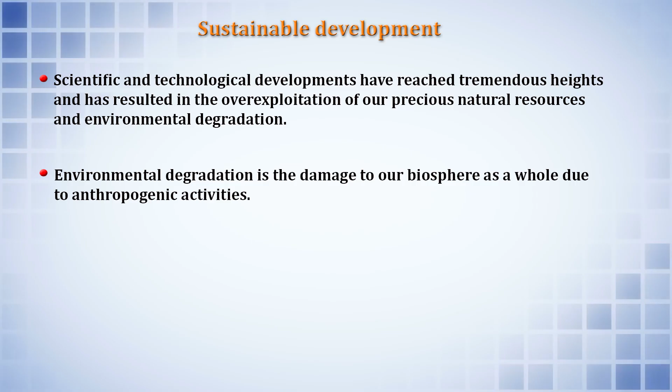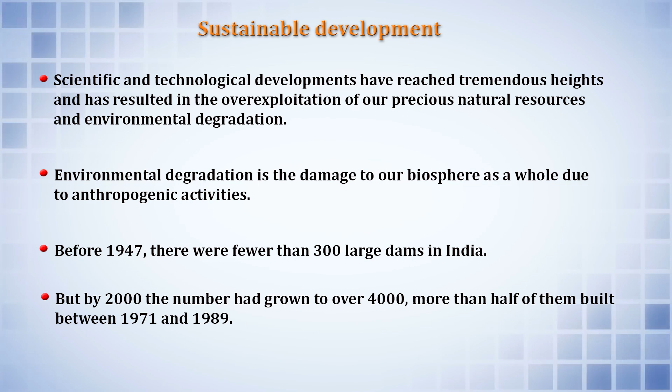Before 1947, there were fewer than 300 large dams in India. But by the year 2000, the number had grown to over 4,000, and more than half were built between 1971 and 1989. So, in dam building, India ranks third in the world after the United States and China. Primarily these dams were built for flood control, water supply, hydroelectric power generation as well as irrigation for the people.

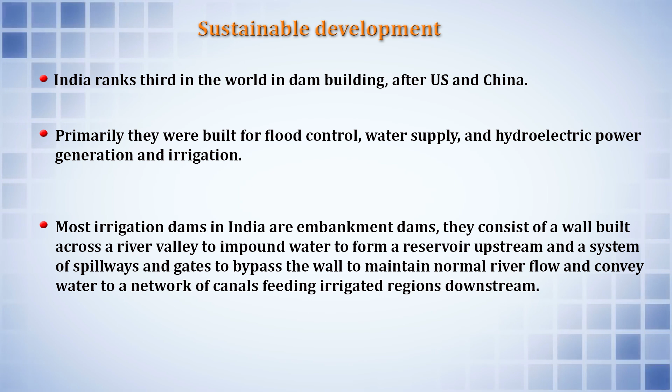Most of the irrigation dams in India are embankment dams, and they consist of a wall built across a river valley to impound water to form a reservoir upstream, and a system of spillways and gates to bypass the wall to maintain a normal river flow and convey water to a network of canals feeding irrigated regions downstream. The upstream areas that feed the dam and those submerged by its reservoir make up the catchment area, and the downstream areas fed by the irrigation canals make up its command area. So, these two are important, the catchment as well as the command area.

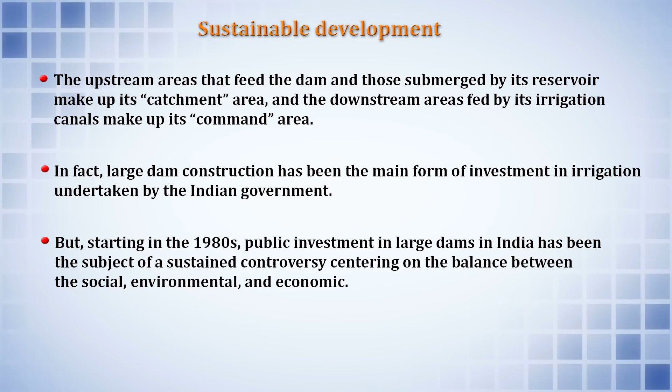In fact, large dam construction has been the main form of investment in irrigation undertaken by the Indian government. But from the 1980s, public investment in large dams in India was a subject of sustained controversy, centered on the balance between social, environmental and economic aspects. The dams have resulted in loss of biodiversity, deforestation and a higher incidence of natural disasters like floods, landslides, seismically induced earthquakes and related socio-economic problems.

Various river valley projects, like the Sardar Sarovar Dam built on the river Narmada, aimed at providing electricity, drinking water and irrigation to the states of Maharashtra, Gujarat and Madhya Pradesh. This project displaced and uprooted more than 1 million tribal people from 570 villages, and that was a real socio-economic problem. That led Ms. Medha Patkar, an environmental activist, to sit on dharnas and strikes and even fast for quite some time to take up this issue. Such is the importance of the socio-economic aspects when dams are built like this.

Hydroelectricity. So, let us come to the topic: electricity that is produced from hydropower. In 2015, hydropower generated almost 16% of the world's total electricity and 70% of all renewable electricity. Hydroelectricity is the electricity made by generators that are pushed by the movement of water.

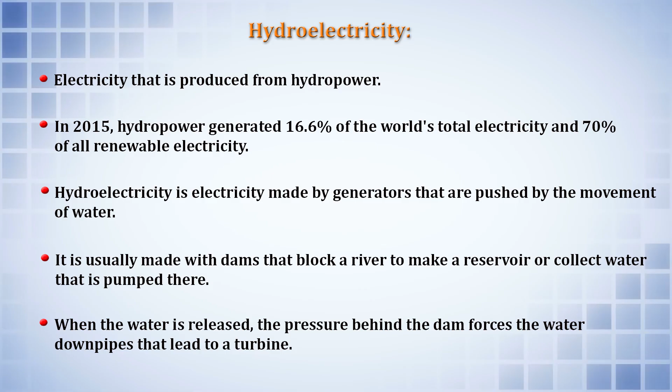So, it is usually made with dams that block a river to make a reservoir or collect water that is pumped there. So, we have already discussed how the dams are constructed and how the hydropower also can be generated. When the water is released, the pressure behind the dam forces the water down pipes that lead to a turbine. In India, for example, we have a large amount of hydroelectricity, and we also have the thermal power plants.

Now, in the hydroelectricity, this is low, and it makes it a very good source of renewable electricity. In many other places nuclear electricity is also used, and the hydro station is good in one fact because it consumes no water, unlike coal or gas plants, and with a dam and a reservoir it is also a flexible source of electricity because the amount produced by the station can be varied up and down rapidly in order to adapt to changing energy demands.

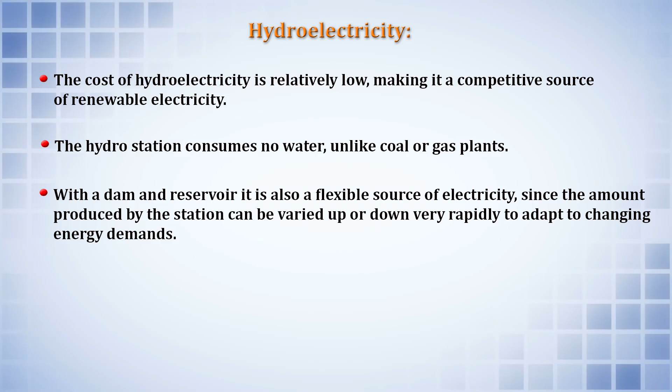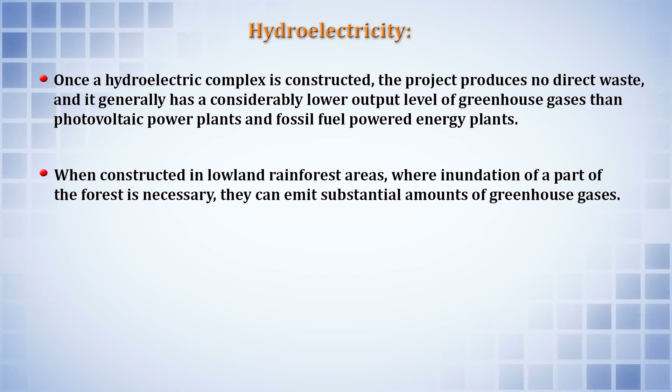Once a hydroelectric complex is constructed, the project will produce no direct waste and it has a considerably lower output level of greenhouse gases than the photovoltaic power plant and the fossil fuel powered energy plants. When these are constructed in lowland rainforest areas, inundation of a part of the forest is necessary, and they can emit substantial amounts of greenhouse gases contributing to climate change.

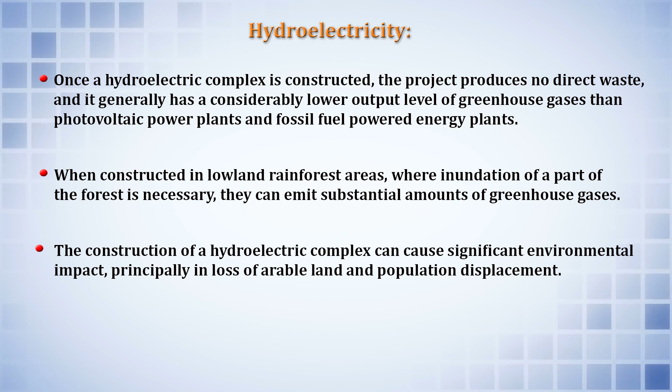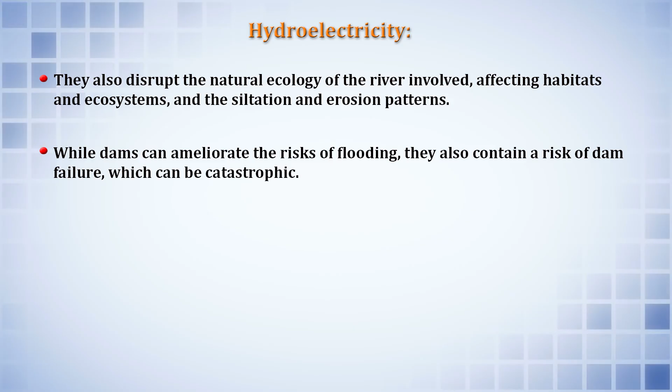So, the construction of these hydroelectric complexes can cause significant environmental impacts, principally the loss of arable land and population displacement. They can disrupt the natural ecology of the river, the habitats and the ecosystem in that area, and they can affect the siltation and also the erosion patterns. Dam constructions, while they can ameliorate the risk of flooding, also contain a risk of dam failure, and that can sometimes prove to be catastrophic.

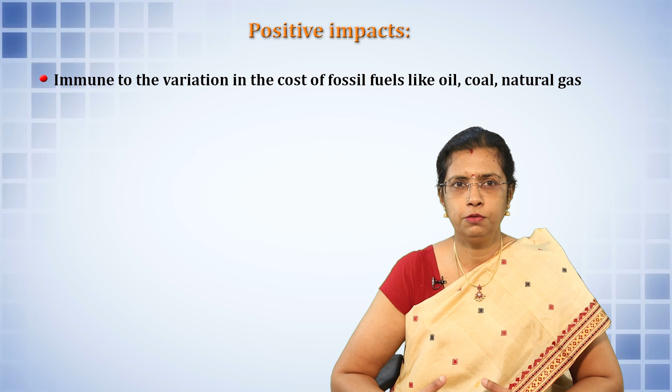So, what are the positive impacts of hydroelectricity? They are immune to the variation in the cost of fossil fuels like oil, coal or natural gas. It is a renewable source of energy. It is a clean source of power, and even in remote areas you can provide electricity. There is improvement in living standards, employment opportunities are given to many, and there is also the creation of a reservoir.

Now, in the EIA studies, basically the background of the project has to be understood. Methodologies have to be described and outlined. Detailed baseline studies have to be conducted. Physiography of the area, hydrometeorology, the soil characteristics, geology of the area, the bedrock characteristics, and the seismicity, whether it is a seismic prone area, also need to be described. The land use and land cover types, floristic and forest types, all this has to be written clearly in the project which is submitted.

Then the faunal elements, aquatic ecology and fisheries, impact assessment and evaluation of the same has to be described. Then whether there can be any impact on the aquatic ecosystem, whether there will be any change in land use and habitat destruction, location of the various structures, species population loss, will that be affected due to these hydroelectric power projects.

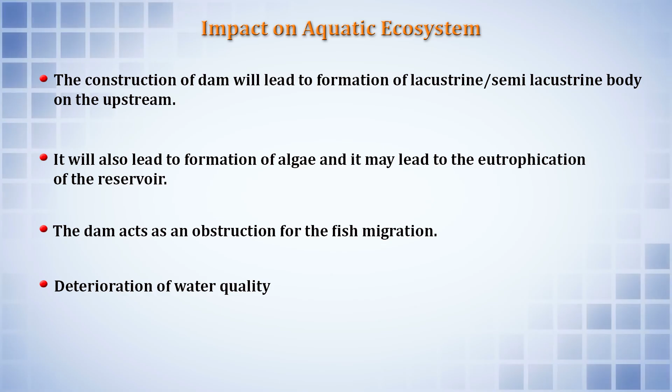Let us now take the impacts on the aquatic ecosystem. The construction of a dam will lead to the formation of a lacustrine or semi-lacustrine body in the upstream areas. It will lead to the formation of algae, and that can lead to eutrophication of the reservoir. Then the dam can act as an obstruction for fish migration. Deterioration of the water quality will proceed. So, those will be some impacts on the aquatic ecosystem.

Then there can be runoff of the loose muck, effluents from the crushers, sewage disposal from the labor colonies, that is, those people who are working in the project will be making some temporary camps and shelters. So, from there also the sewage disposal can come. Then activities such as bathing, cooking and drinking will have a negative impact. In the same way, untreated sewage can also be disposed in the river, and it will lead to an increase in the organic content of that river.

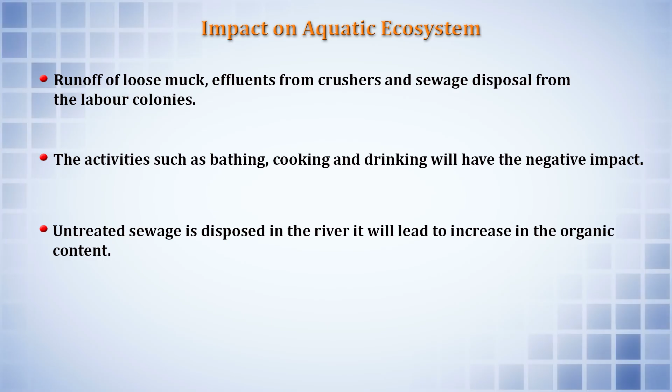In the same way, impact on the air environment. So, the vehicular movement that is needed for the drilling, for the tunneling and for the digging purposes. All these are the infrastructures that come along with the project, and these mechanized machinery will have a lot of movement, and they will also emit a lot of the air pollutants.

Then they use the diesel generators to supply the electricity. There can be emissions of the nitrogen oxides, the sulfur dioxides, production of carbon dioxide and methane due to the decomposition of the organic matter, and also from the primary processes. All this will impact the air quality and the air environment.

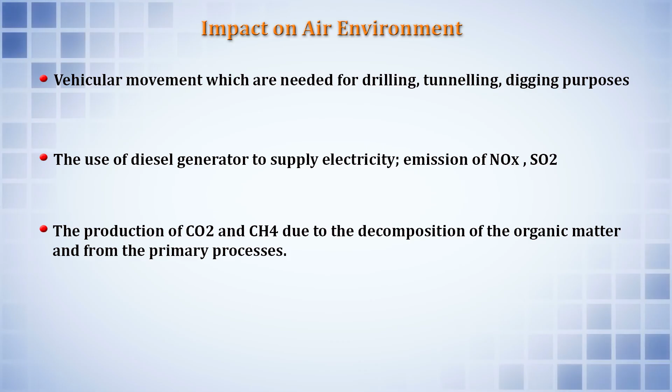Noise pollution. There will be the construction activities. Older people and young people are highly sensitive receivers. When there is blasting, a lot of noise will be generated. So, the noise can actually trigger high blood pressure, and when such high noise levels are coming consistently every day, they can also get affected with cardiovascular diseases, they can have sleep disorders and so on. So, noise pollution is also a very important factor and outcome of the hydropower complex and project activities.

Then whenever any EIA assessment is being done, the tools and techniques that are going to be used also need to be analyzed. So, what are the maps and the overlays that are going to be used, any network diagram to be used, matrices that are going to be used, this needs to be described. Based on the project details and the baseline environmental status, the potential impacts as a result of the construction and operation of the proposed hydroelectric project can be identified.

So, the EIA for quite a few disciplines is subjective in nature and this cannot be quantified, but wherever possible the impacts can also be quantified, and otherwise the qualitative assessment can be undertaken. The anticipated positive as well as negative impacts of the proposed project have been enumerated both during the construction and the operation phases in many of the hydropower projects. So, the construction and operation phase will comprise various activities and each of them will likely have different impacts on the environment. Thus, it is important to understand and analyze each activity and to assess the individual impacts on the environment.

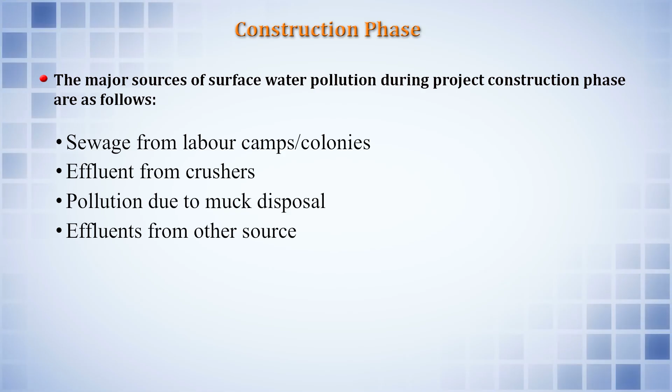Then, if we have to take the water environment, we need to describe the water quality, the sediments presently there and what will be generated as a result of the activity, water resources and the downstream users who are using this resource. Then, in the construction phase, the major sources of water pollution can be the sewage from the labor camp, from the crushers, the pollution due to the muck disposal, and also from other sources.

Operation phase, you can have it from the project colonies, from the reservoir water quality, eutrophication risk, and also the sediments. Air environment: during the construction and operation, generally there will be a lot of air emissions that are coming out, even the particulate matter which can actually obstruct the lungs and the respiratory system.

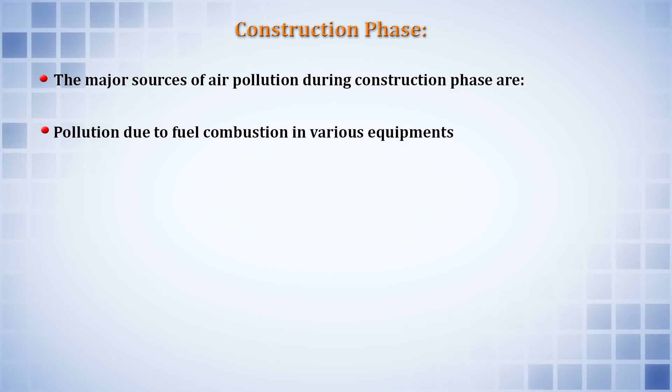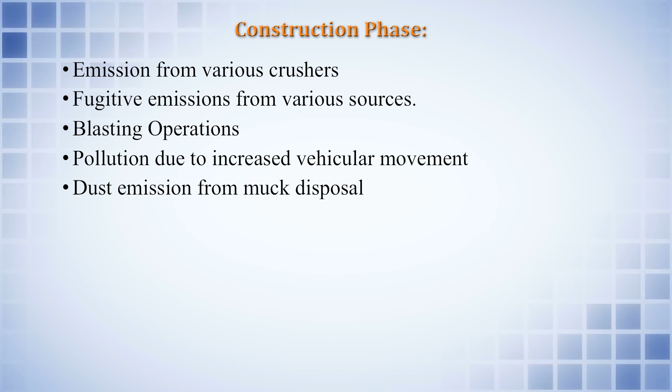In the construction phase, the pollution due to the fuel combustion in the various equipments can also impact the air quality. So, this could be from the crushers, from various sources, blasting operation, pollution due to increased vehicular movement, dust emission from the muck disposal, and then during the operation phase also particulate matter due to vehicular movement and from the muck disposal. All these can be certain places and sources for the emissions.

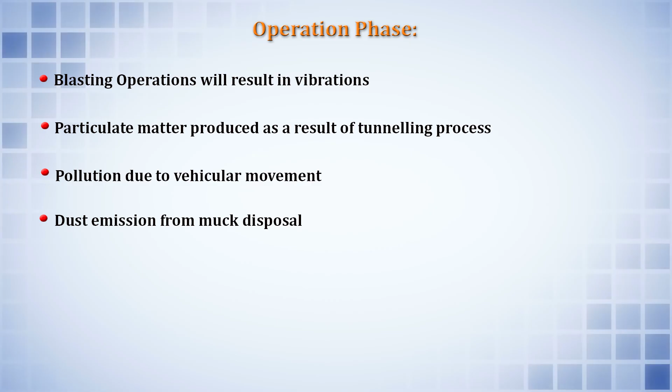Impacts on the noise environment. Here again, during the construction phase, increased noise levels will be expected due to the earth moving machinery, and otherwise due to the quarrying, the blasting, the vehicular movement, that can also have adverse impacts on the ambient noise levels in that area.

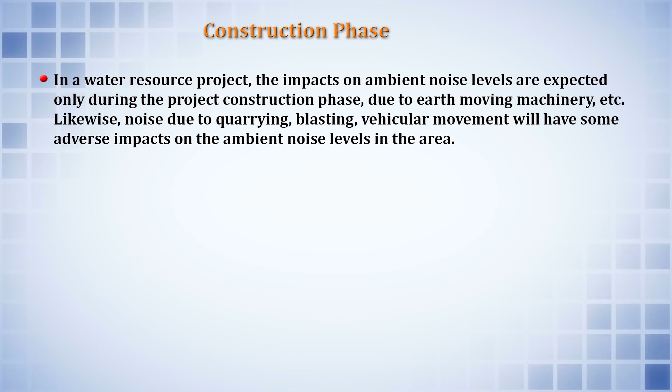In the same way, impacts on the land environment. So, the land impacts also have to be assessed during the construction and the operation phases. The anticipated impacts on the land are due to the quarrying operation, operation of the construction equipment, soil erosion, muck disposal, acquisition of the land.

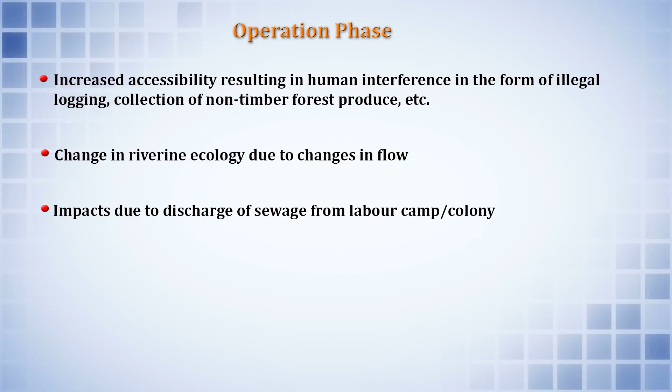Now, the biological diversity may also be impacted due to the river projects. So, there can be impacts on the terrestrial flora, on the terrestrial fauna, and on the aquatic flora as well as the fauna. Operation phase. Here in this phase also there can be illegal logging, human interference in the collection of the non-timber forest produce, then change in the riverine ecology due to changes in the flow patterns, impacts due to discharge of sewage from the labor camp and colonies, impacts due to human activities, impacts on migratory fish species, then the impacts due to land acquisition.

So, in case large areas are necessary, land acquisition will be inevitable and rehabilitation has to be provided for all the displaced villagers. Impacts on the cultural, religious and historical monuments. So, whether there is any historical or archaeological importance, any monuments, will that be impacted due to this project? Increased incidence of water related disease, for example breeding of the vector, aggregation of the labor and excavation. So, the water related disease incidences also should be noted down.

Impact on the geological environment. Now, since the project can exert pressure on the land below, a thorough study of the rocks in the upstream area, the central and the downstream areas of the project also has to be carried out.

So, dear viewers and learners, I hope you have had a good understanding of the environmental impact assessment which has to be done on a hydroelectric project which is submitted, and we have described all the various possibilities that have to be evaluated. For example, starting with the baseline studies, that is, at that time, what is the status of the environment, then all the geological details of the area, the soil details, the topography, the type of activities that are going to be carried out, the type of machinery or equipments that will be used, and the likely impacts that will be caused on the noise levels, on the land environment, on the air quality, on the water quality, on the vegetation, and also if there are any cultural or religious sites of importance, whether that will be affected.